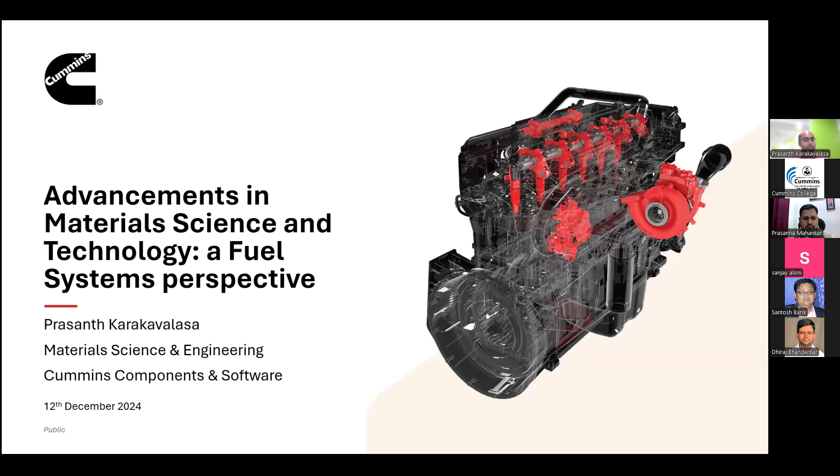So, if I may share my screen. Nikhil, you please stop it. Now you can do. Okay, give me 1 second. Just fumbling with my... I hope my screen is visible. Yes, visible, perfectly visible. Okay, thank you for the confirmation.

When I was looking at the photograph in my introduction, I kind of assumed you took it from my LinkedIn profile, and that reminded me I should get that updated. Clearly, there have been some changes since then.

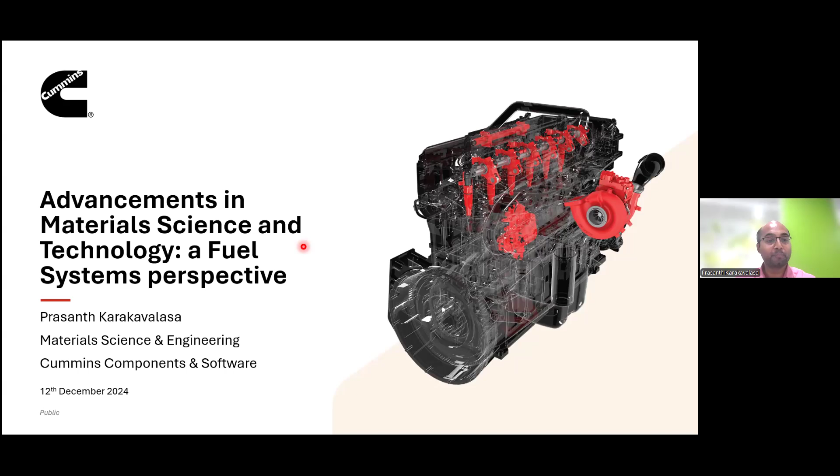In addition to what Prasanna has already said, I added a few pointers, a one-page introduction about myself. As mentioned, I lead the Material Science and Engineering Group for Cummins Components and Software. That is my day job. I have two other hats that I wear. I'm also in Advanced Materials, what we call Product Preceding Technology, PPT for short - this is before we have any product and we want to verify a technology. I take care of that for Cummins Components and Software. I also lead the India Material Science Technical Functional Excellence.

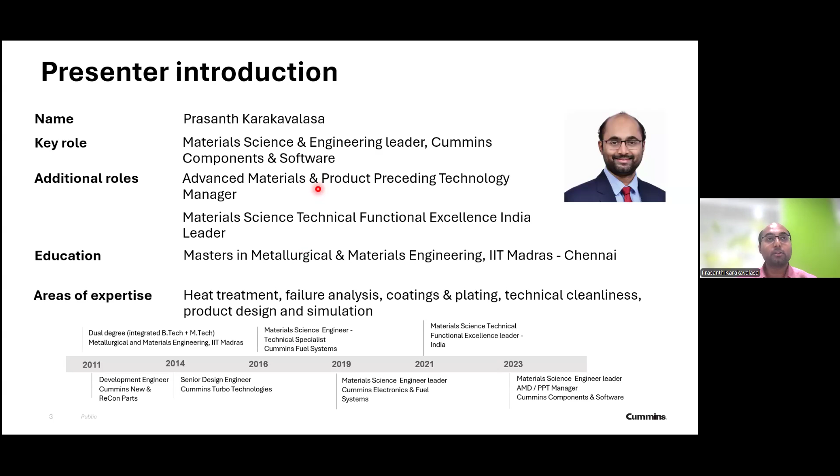Basically, what functional excellence does is get all the material science engineers working in Cummins India to create a platform for them to get together, share ideas, benchmark certain standards and specifications, and also create a bridge between the material science engineering teams that are working globally across Cummins and the ones working in India. My education, I have done my master's from IIT Chennai in metallurgical and materials engineering.

My areas of expertise include heat treatment, failure analysis, coatings and platings, technical cleanliness, product design, and simulation.

I basically started off in Cummins itself in new and recon parts in 2011. Then I moved to Turbo Technologies as a design engineer, worked there for two years, and finally in 2016 came back to my core subject, which is material science, in Cummins Fuel Systems. Thereafter, there have been some changes in the business units. Electronics became a part of fuel systems in 2019. Then I took on the functional excellence leader role in 2021, and currently I'm also leading a bigger team under Cummins Components and Software.

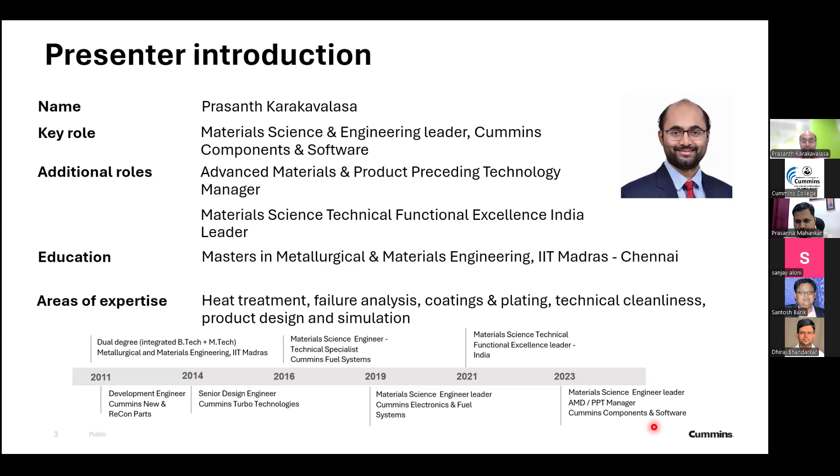Okay, a brief introduction about Cummins. Many of you might already be aware, so I would not spend too long on this.

Cummins was founded in 1919 by Clessie Cummins and W.G. Irwin. They believed that diesel power is something which can power the world for a very long time, and that is true. This was more than 100 years ago, and we still have diesel engines powering many vehicles across the world. Cummins did not invent diesel technology - there was an available technology and we transformed it into a reliable everyday power source.

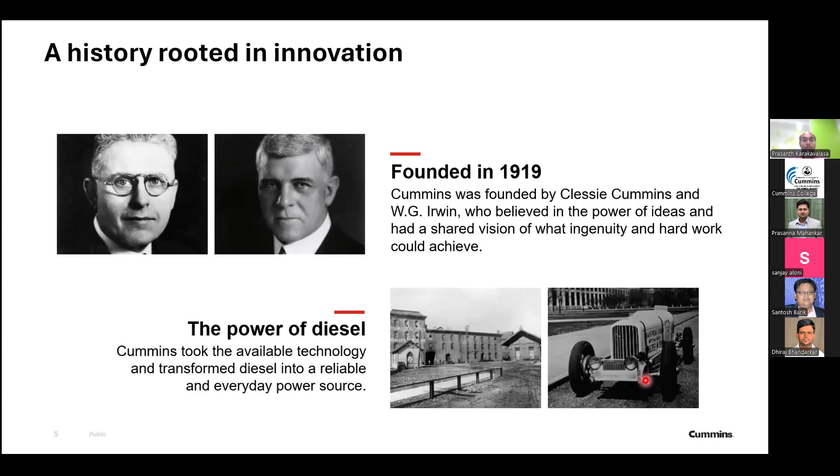Cummins operates out of 190 countries and territories. There's globally nearly 75,000 employees, 105 years of industry leadership. We have dealership outreach to all our customers through 19,000 dealers, and we spend nearly $1.5 billion on average in a year for R&D.

Cummins is located all around the world. We have five major business units. The Engine business unit is located in US, India, Brazil, and UK. Components is again located in all these countries. One common denominator you see is India is present in almost all the four core businesses in addition to US. China is missing out on the engine business, but they have Accelera by Cummins.

Accelera is a new division by Cummins, which focuses entirely on fossil-free, fuel-free power, either battery or electrified power.

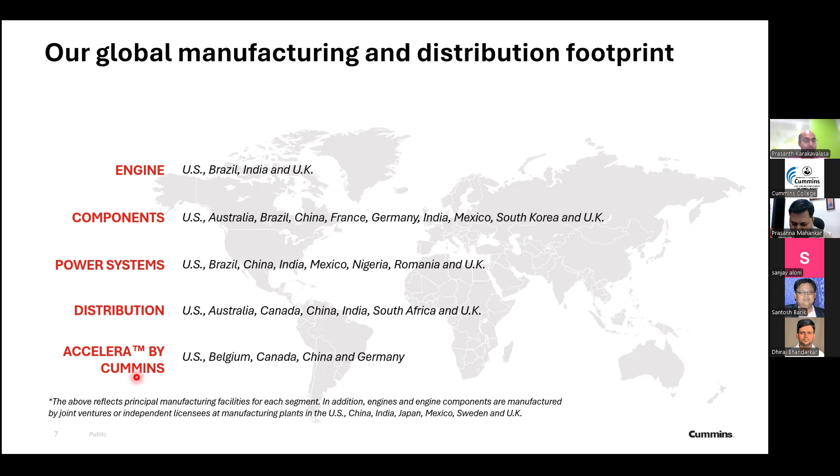These are the new technologies and innovations that Cummins is currently working on: electrified powertrains, fuel cells which are hydrogen powered, and other hydrogen production technologies. You cannot run a fuel cell or a hydrogen internal combustion engine without having a reliable source of hydrogen. We are also working on automated manual transmissions or AMTs that are very popular in passenger vehicles now.

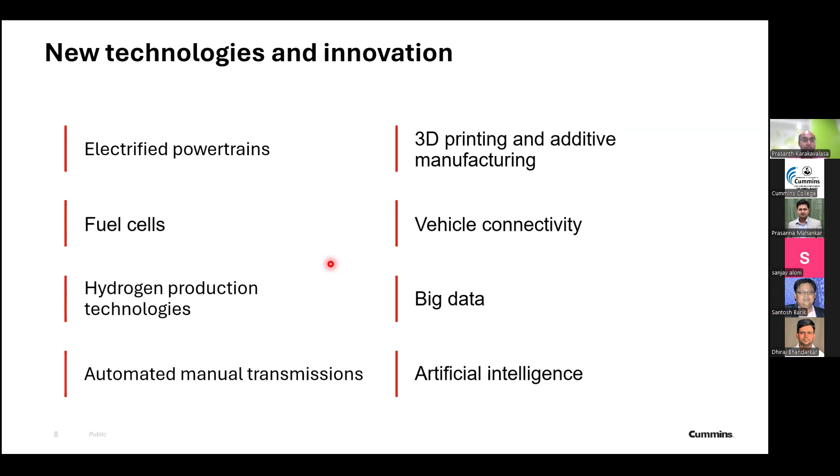We are also evaluating some 3D printing and additive manufacturing, a big footprint for material science here. Vehicle connectivity - we talk about big data, and many of our cars today you can connect, you can remotely control them through an app, turn them off, turn on the AC from wherever you are. All those things we're trying to integrate into the engine. Now with so much connectivity, that's going to generate a lot of data. How do the computers in the back end crunch these numbers? How do we give predictive maintenance rather than preventive maintenance to our customers? And last but not least, the buzzword of this generation, artificial intelligence.

As I was mentioning, there are five operating segments in Cummins. The base engine or the base business, where the core of Cummins revenue comes from, is called the Engine business. That includes everything like the power cylinder, the crankshaft, cylinder heads, and other accessories. The Power Systems business is an extension of the engine business in a way - they take care of all the high horsepower engines, and standby generator sets that provide power in standby applications or off-highway applications.

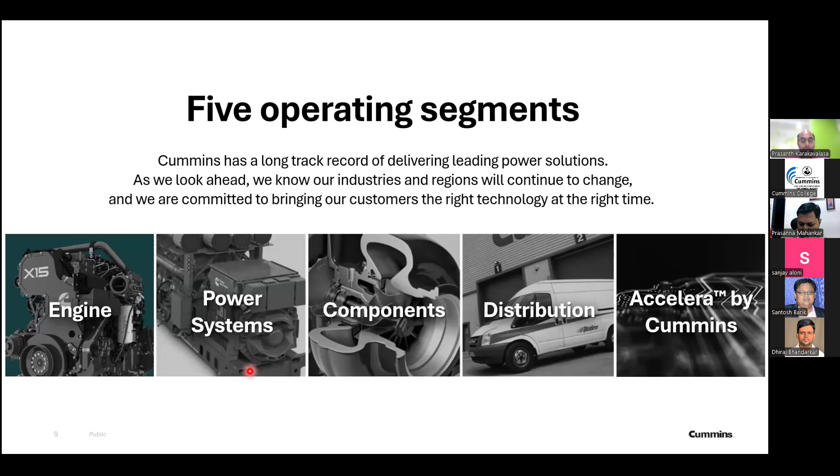Then we have the Components business - all the peripheral systems that go onto the engine, like an after-treatment system or a turbocharger, go under the Components business, a separate business operating unit. The Distribution business ensures that all these three business units' products go to our customers, and customers get our after-sales support through the DBUs. Then Accelera by Cummins, as I was mentioning, is a new business unit for all the fossil-fuel-free power generation that Cummins is working on.

If I break down the components business unit, we have three major business units. We have the after treatments, named Cummins Emission Solutions. We have Cummins components and systems, where I currently work. This includes the turbo technologies business, engine braking, Cummins fuel systems, and the sensors and electronic module business. These four together make up Cummins Components and Software.

Then another organization in the Cummins business unit is the drivetrain and braking systems. This is where the automated manual transmissions and transmission power lines for Cummins engines come from.

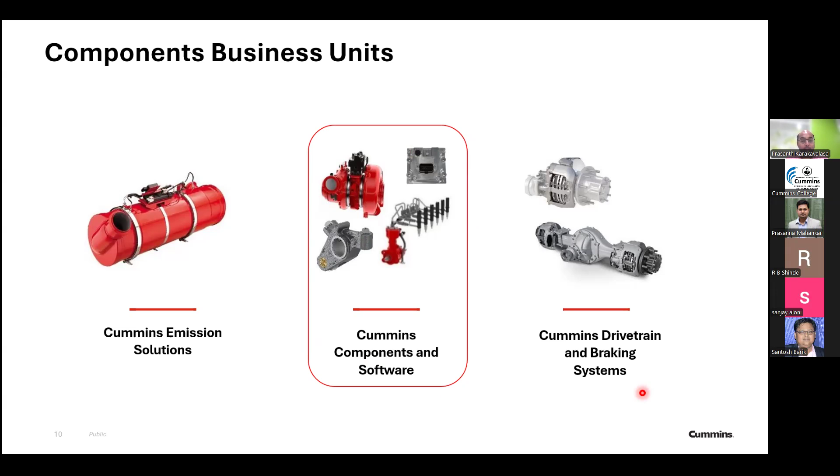We have a vast number of applications that Cummins engines are used in today: heavy duty trucks, medium duty trucks that we see on the roads, pickup trucks, which is very popular in Europe and the US market, though India is still catching up. We're also present in buses, oil and gas, electrolysis, marine, defense, agriculture, and rail.

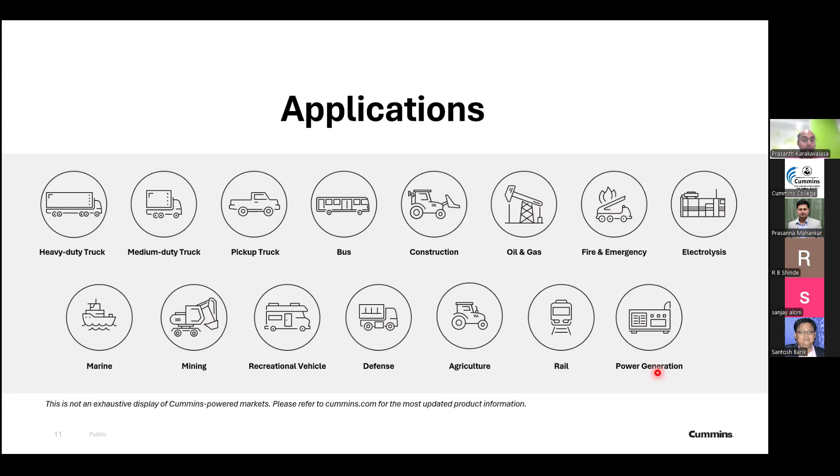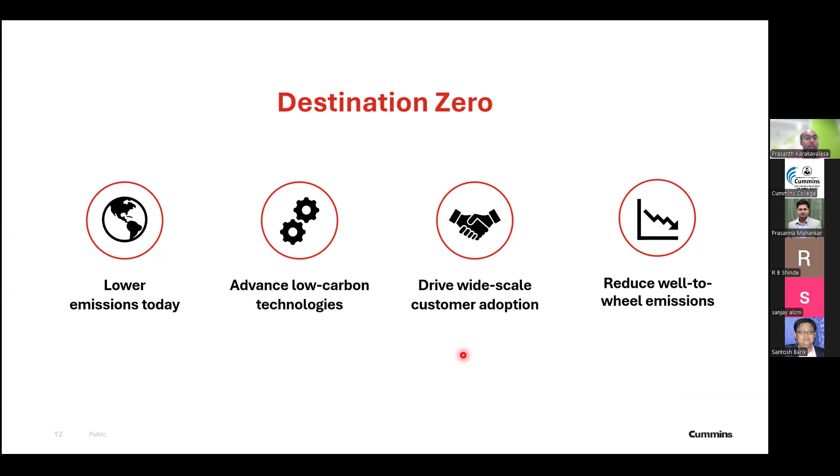Destination Zero is basically Cummins' vow to the community and to themselves that we want to lower our emissions today. We want to advance low carbon technologies, drive wide scale customer adoption, and the main focus is to reduce the well-to-wheel emissions of our products.

How we are going to achieve it is we'll continue to innovate and invest, but this is something we are partnering with our suppliers and customers on, to ensure they understand that actions are required today through crucial partnership. Cummins will support through all the technology leadership we have available.

We are looking at different energy sources like low carbon fuels, decarbonized grid, green hydrogen economy, and how we are going to do hydrogen storage. There are also other power solutions, like can we make advanced engines with better fuel efficiency and lower environmental impact, and can we come up with some kind of hybrid engine model that works.

I think we are familiar with this. It works on fossil fuel as well as battery technology. Cummins also has a battery electric truck that we have launched, and fuel cell electric options. These are the different power solutions Cummins is exploring as part of the Destination Zero initiative we have taken.

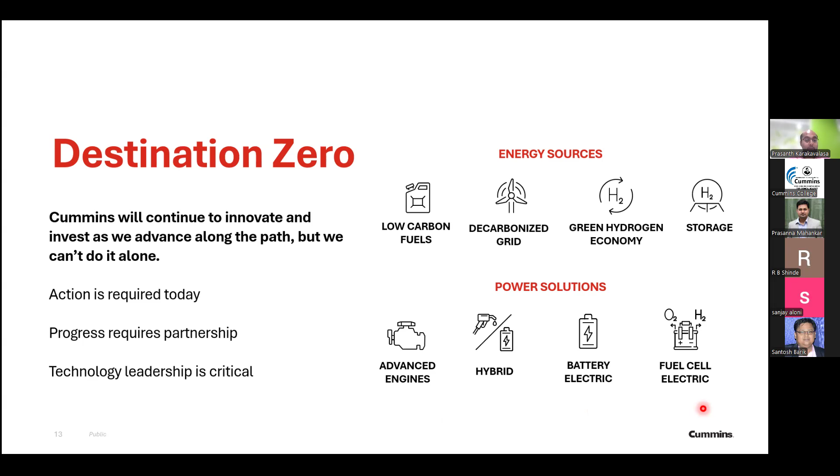A quick look at Cummins in India. Again, a quick recap of how we are located. Within Pune, Cummins has the headquarters, which we call the India Office Campus, located in an area called Balewadi, for those familiar with Pune.

I myself work out of the India Technical Center, located a little on the northwestern side of Pune. All the engineering and technical folks work out of the India Technical Center, or ITC as we like to call it, and all the non-technical administration, purchasing, and supply chain folks work out of the India Office Campus.

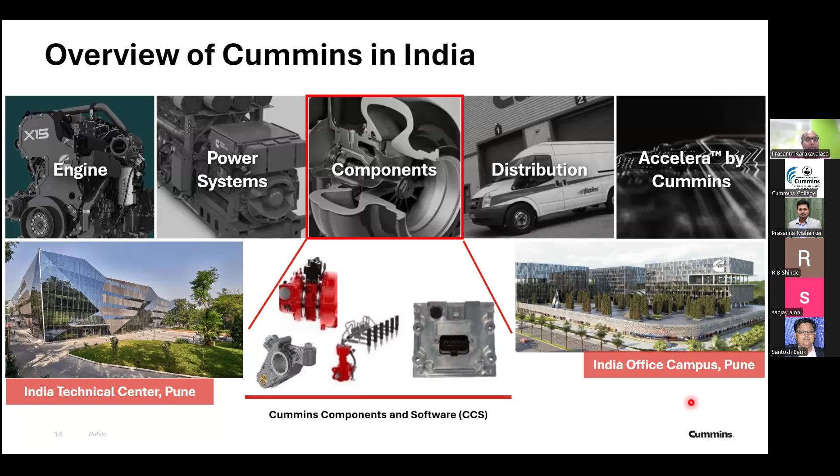Okay, now we move to a section where I talk about Cummins.

Yeah, sorry, let me get some water.

And material science and engineering. We always like to joke that ours is a secret society because we are always in the background doing applied alchemy and experimental blacksmithy. If you look at material science or metallurgy, we actually started off like this: a bunch of folks forging, doing some blacksmithy work to make probably horseshoes, and an alchemist trying to mix different chemicals and potions and trying to make some medicine, hopefully. So our tagline is: you can't really make it without materials. Of course, everything else is immaterial.

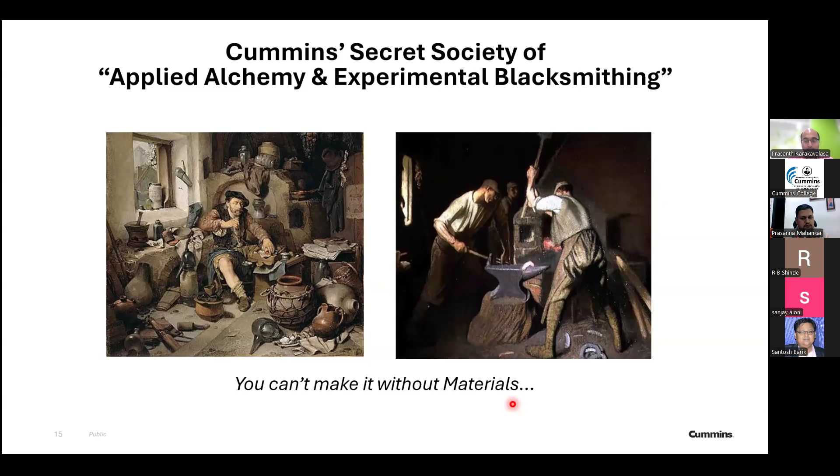If you look at the presence of our team, we are located in every country or major operating country that Cummins operates in the world. The Cummins headquarters is located in Columbus, Indiana now, and that's where we have the fuel systems engineering lab, the turbos engineering, and the turbos lab.

We also have valve train, which is located in Bloomfield, Connecticut. We have some turbos lab in Charleston. At Juarez, we have our engineering, and we also have a very big manufacturing hub in Juarez.

Huddersfield in the UK is the major headquarters for our turbo business, where we have both engineering lab and production. Södertälje in Sweden is a fuel systems lab. Pune, where I'm located currently, we have all three turbos, fuel systems, a bit of valve train, and corporate R&D lab. Phaltan, a couple of hours from Pune, has another lab co-located with the manufacturing facility.

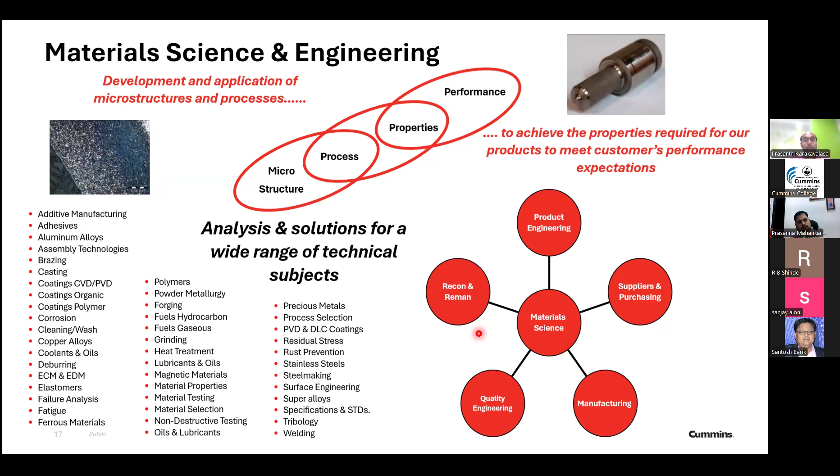The remanufacturing division of Cummins is called Recon. We also work with them to understand if they have any field failures where customers want those parts remanufactured instead of scrapping and buying something new. We work with the Recon or Reman team to come up with processes which can help reclaim those failed parts, because we were part of the initial design, the material and process specifications of the product. So we end up being the best judges of what and how they can repair or reclaim these parts.

If you look at an MSE role - I'm going to use the abbreviation MSE a lot, it basically stands for Material Science and Engineering - if you look at a product life cycle, we provide conceptual and experience-based expert knowledge through testing and analytical capabilities so that the product engineers and development teams can incorporate those into the design of the product and help them solve rapid problems.

If you look at it, the cradle is the infant stage of any product, when it just started. You have a new material or processing being developed, which is driven through what I explained - PPT, product preceding technology. And if that's not enough, if you have a new material and processing, you should also have a way to manufacture it. So we have something called advanced manufacturing or advanced method development, abbreviated AMD.

While we are doing that, we also ensure that the products and materials we are choosing are environmentally sustainable and complying with all the regulatory requirements. Cummins operates in every known country, so it's not just REACH and RoHS or US EPA regulations, but individual countries might have some requirements. So we have to ensure that we are complying with all these regulatory compliances.

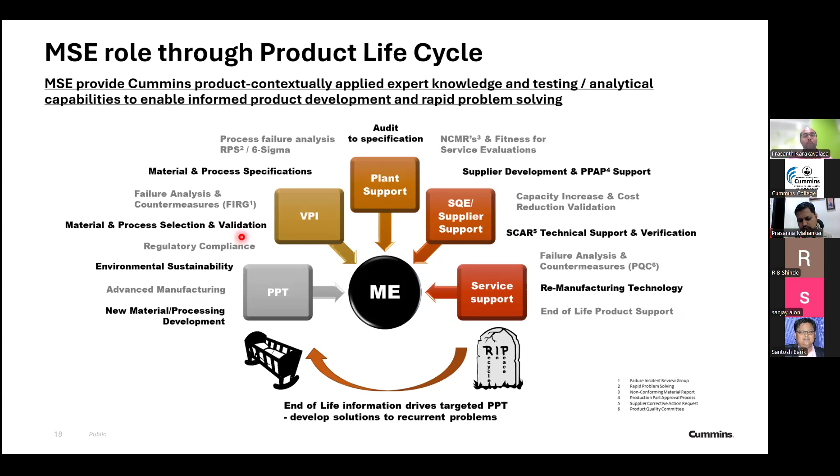Let's be honest, at the end of the day we are a business, and more sales means more profits, right? So of course, initially the profits will be low because we are investing for a new product, validation costs, developments. So after the initial introduction is when the profits will start showing up.

One aspect that I probably missed in the previous slide is we also support the company for competitive analysis and benchmarking of other products.

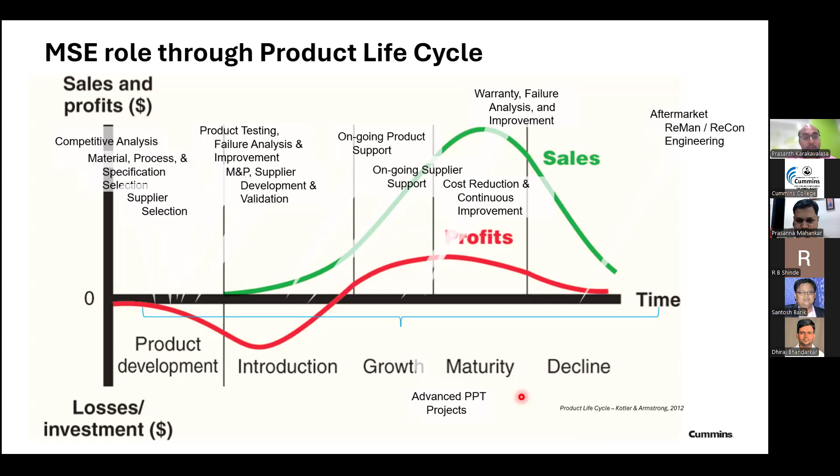What's important is in the previous slide, I showed PPT as something we do at the infant stage, but this slide summarizes it more accurately. We do advanced PPT projects throughout the product life cycle. At any point, even for cost reduction or warranty, we might think this technology, manufacturing process, or material is better than what we have today, but we don't have enough data to support this. So a PPT project may be launched at any stage, and somebody might take it upon themselves to prove that a particular technology, process, or material will be a suitable replacement while the product is in the field.

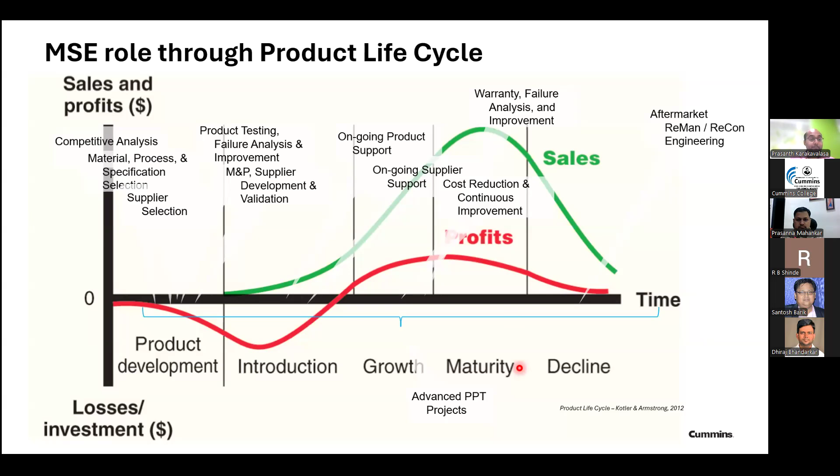Okay, well I'm doing better than my time. So, in terms of competencies, we have three different business units that fall under Cummins components and systems, material science engineering.

When I look at turbos, they mostly deal with superalloys or high temperature materials. Their main concerns or failure modes are either creep or thermal fatigue.

Fuel systems, on the other end of the spectrum, deal with clean steels and heat treatments. Our main concern or failure mechanism is pressure fatigue, because our pumps operate at very high pressures, and there's certainty that the parts will be subjected to fluctuating pressures of fluid circulating within our pumps and injectors.

We also work a lot with polymers, elastomers, and sealants, because with high pressure systems, leaks are very common. So we have to use sealing more often than not. We also have something called precision cleanliness, or technical particle cleanliness.

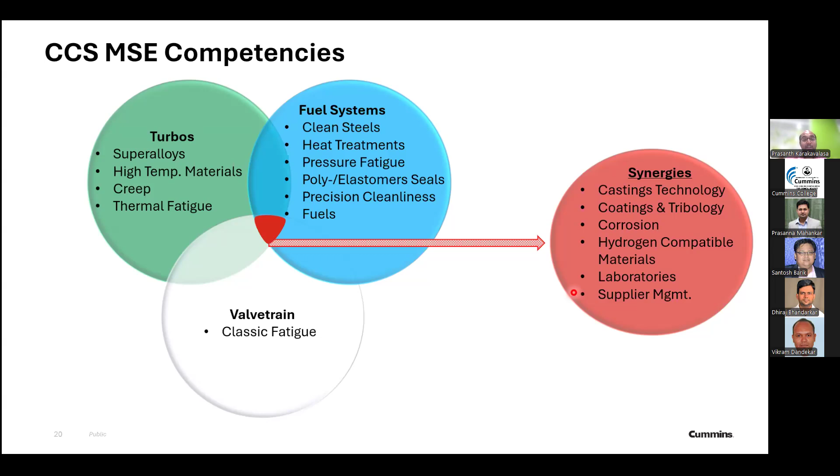The first one is steel quality and sourcing. This is one of our core competencies that we develop. Why is it critical? As we all know, the quality of the material or steel we use is very critical to ensure we get robust strength and fatigue resistance even under extreme cyclic pressure. The pressures we're talking about are nearly in the order of 2100 to 2400 bar - that's extremely high pressure.

We have a team with very in-depth knowledge of steel making practices, where we work together to identify world-class steel mills that can provide the clean steel the fuel system business needs. We also have CES, Cummins Engineering Specifications, that suit few applications, in line with available industry or other non-fuel-systems business unit standards, but sometimes they may not suit the fuel system requirements.

So we also want to protect our customers from adverse or poor quality steel allocations, especially during a cyclic economy. Especially for those who work closely in this industry, right after COVID, because oxygen was being redirected to the medical field, steel industries had a lead time of more than a year for supplying any special quality steel needed. And that cyclic economy keeps happening.

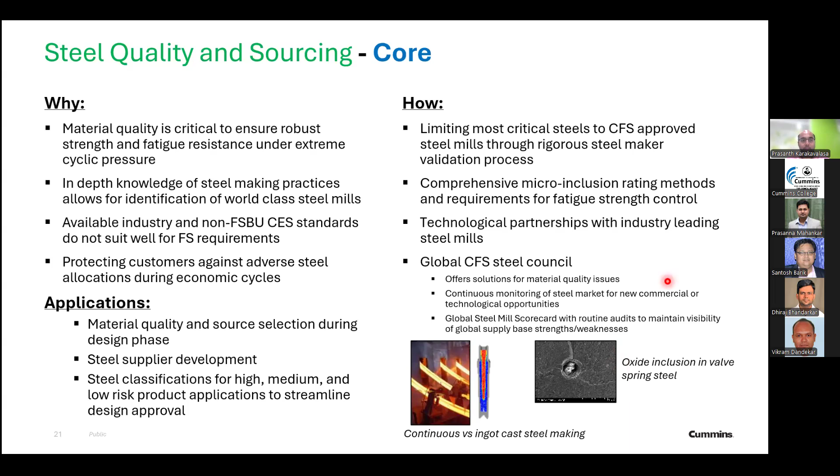Another core competency that we have is precision heat treatment. Fuel systems has a wide range of heat treatments. We heavily focus on vacuum-based processing because we tend to avoid intergranular oxidation or decarb on the surface, which are usually seen in SQF or an atmosphere-based process.

Of course, we are all metallurgists, we know that some of these requirements often conflict with each other. If you need high hardness, then you are losing out on toughness. If you have strong fatigue strength, then distortion during the heat treatment could become a little problematic.

And cleanliness of the parts itself, any of you who have visited a heat treat shop know that's not the cleanest place. In fuel systems, we have a very stringent cleanliness requirement. I have a slide coming up where we talk about the technical cleanliness requirements.

Fuel systems outsources most of our heat treatments to tier two suppliers. Sometimes suppliers may not have the required resources or understand our product like we do, to gauge the criticality of a certain heat treatment.

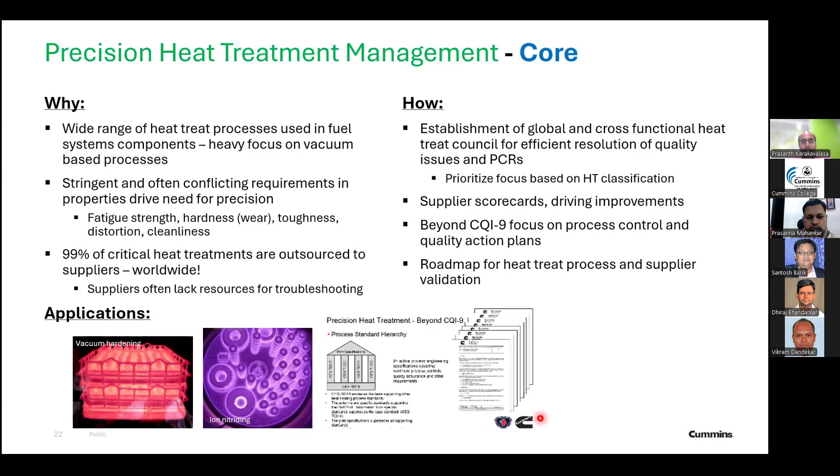We also have a roadmap. We have a very detailed supplier validation plan for each and every heat treatment process. We ensure all these are driven through the Heat Treatment Council. There are different heat treatments we generally delve into, either vacuum hardening or ion nitriding.

Another core competency that we use is PVD or PECVD, that's plasma enhanced chemical vapor deposition, something like a DLC coating. So why is it important?

Coatings are important for minimizing wear and also improving, in some cases, chemical corrosion resistance. We typically use coatings especially where there are poor lubrication conditions, where we are seeing repeated sliding or reciprocating wear, which is very common in fuel systems applications. We also have to deal with different kinds of fuels, and we might have conditions like marine applications where you have either a hydrophobic or oleophobic condition, where the oil may not adhere to a part.

Because of that, you cannot really give wear resistance through just lubricating oil. Also, we have seen cases where coatings, when they reduce wear, increase fuel economy because you're reducing parasitic friction losses. We also ensure that the need for oil additives can be reduced due to additional lubrication. I would go one step ahead and say we can also provide longer oil drain intervals for our customers, because the oil gets dirty slower since you have less wear happening on your parts.

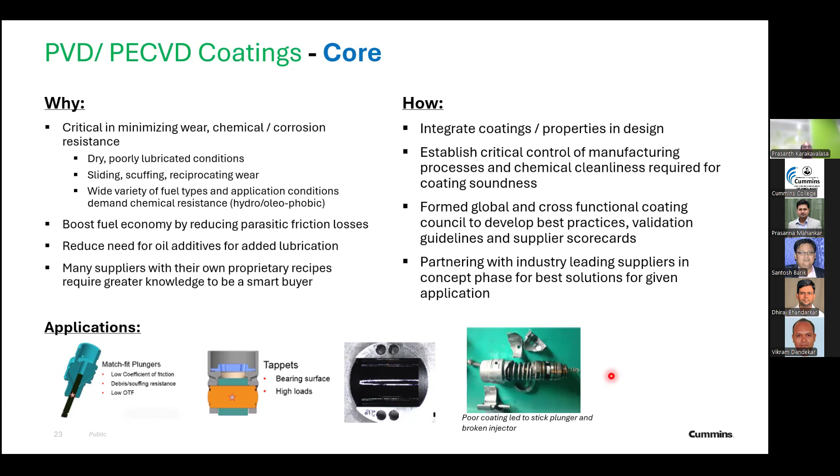The rightmost picture shows a broken pump injector because of poor adhesion coating. The coating kind of spalled off, which led to the plunger seizing, and overall the injector failed.

As I mentioned, failure analysis is another core competency that we've developed within the team. We have three primary failure modes that we are concerned with. One is pressure fatigue, because we are operating at more than 1800 bar pressures, and this is cyclic loading, so we call it pressure fatigue, much similar to mechanical fatigue where you have the load going up and down.

Here the only difference is it's the hydrostatic fuel or oil pressure that goes up and down. This is required to ensure that we have a good fuel spray and we meet the required performance and emission requirements of our customers. And when you have moving parts, wear is always a problem.

We have another failure mode we like to call beat-in. Beat-in is nothing but a combination of an impact loading plus sliding, because when you beat and then the surface slides, you have a beat-in process. You can have pure polishing because of sliding, fretting, which is a small relative motion, then galling and erosion.

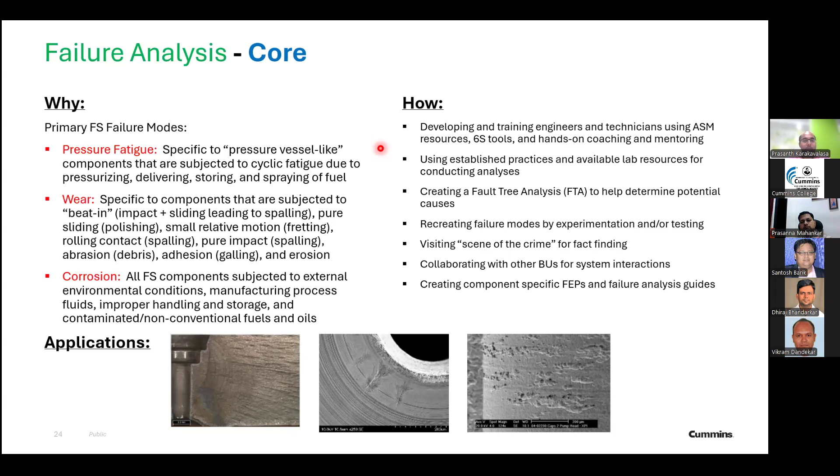Mostly the debris are exogenous, meaning they come from either the fuels, test fluids, the filtration system, or simple handling. There could also be endogenous debris, where during assembly somebody chipped off something and it fell into the bore, blocking it.

It also could be application wear. This happens very rarely, about one in 10 million, but it's still a possibility we're wary about. Of course, our customers ask us to have a robust system against a wide range of applications. So how do we achieve this precision cleaning?

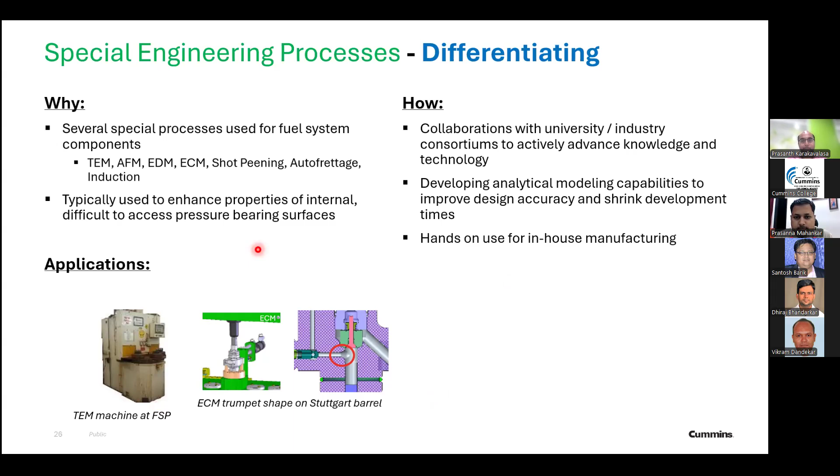We are working with actuator materials, the electromagnetic actuators, because as we move towards more stringent emission norms, fuel injection becomes more and more crucial to control within milliseconds of the on-time demand that we call. So for that, we are looking at different metering valves, piezo injectors, piezoelectric assemblies.

So we are also working with certain processes like pulse laser welding or continuous wave laser welding to ensure that we get a good weld and a very precise joint.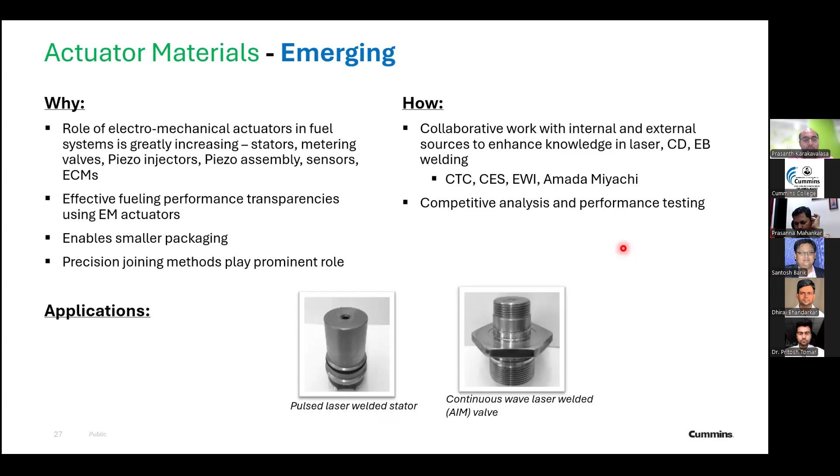We are working with a few internal and external sources. The Columbus Tech Center, or CTC, has vast experience in laser welding. So does the CES, the Cummins Emission Solutions. These are all the vendors, internal suppliers, and customers that we are working with.

Like I said in the beginning, we are also looking at use of green fuels as part of our Destination Zero objectives. This is again driven by global emission norms and the regulation policies that countries are putting in place. Cummins as an organization, ever since we took up Destination Zero, wants to reduce our environmental impact.

Right now, this market is up and coming, so we can kind of get an early mover advantage. We have a few applications approved for HVO fuel. HVO is nothing but hydrotreated or hydrogenated vegetable oil, which is much greener. We also have some applications approved for ED95, which is the ethanol-based diesel.

In the same way, we also have approved use of HVOs and some gas to liquid options, like CNGs and PNGs.

Is it a biofuel or something different than a biofuel? HVOs are biofuels.

Yeah, okay, thanks. And we are also working with ASTMs and IASH, the other industry consortiums, to understand the changing dynamic when it comes to green fuels, and how Cummins and Cummins fuel systems can be the forerunner to adapt these technologies and make sure we are offering the best value to our customers.

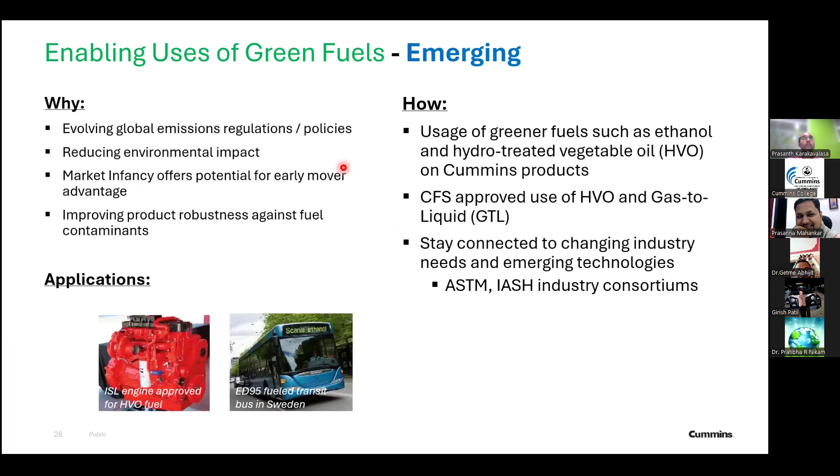Meanwhile, regarding PCVD, TEM, AFM and all these things, I have a little bit of expertise, but I have one question about MOUs or summer trainings for students. Would you be able to make these things available for students, Saji? Can any academician or college approach your organization in this regard?

With respect to Cummins College, Cummins already has a long-standing relationship with the college, so yes, we should be capable. Of course, I'm not an expert on everything, but if you have topics you'd like someone from our industry to talk about, I can always find the right expert or appropriate person who can speak on it. Thank you for pointing that out.

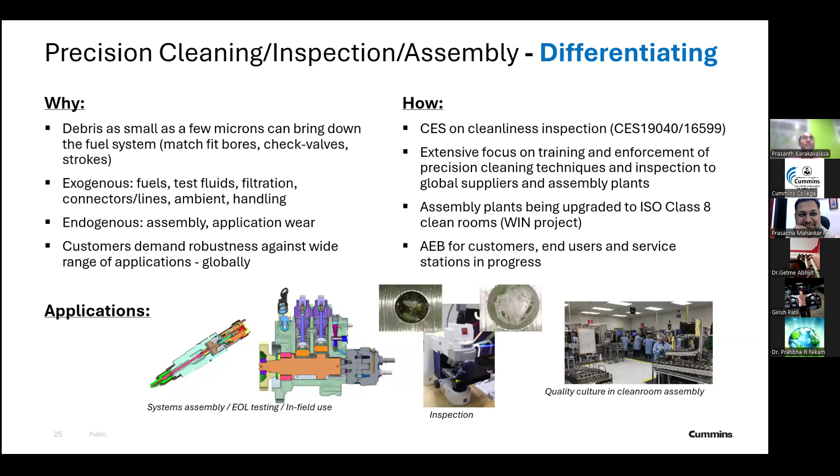I realized that when Professor Prasanth mentioned there are people from other backgrounds, I thought, oh no, I made a presentation heavily focused on materials engineering. But actually it wasn't that focused on materials engineering because I didn't talk about metallographies, metallurgies, coatings, or microstructures. I gave a generic overview of how my team operates, our different strengths, how we're developing things, and how we collaborate with industry experts, academia, and consortiums. Thank you for the feedback.

Thank you, Saji. But can you allow science students or graduate students in that particular program? I'm asking about graduate students because we have that stream with us, not tech or engineering students.

Same thing applies - if you can send me the list of topics that could be of interest, I can check within, and I can get you in touch with the right person who can provide that.

Thank you, Saji. Ma'am, Cummins is working on hydrogen fuel, so obviously you know about these things. The physics of the behavior of hydrogen fuel when it burns will help Cummins develop better hydrogen compatible components.